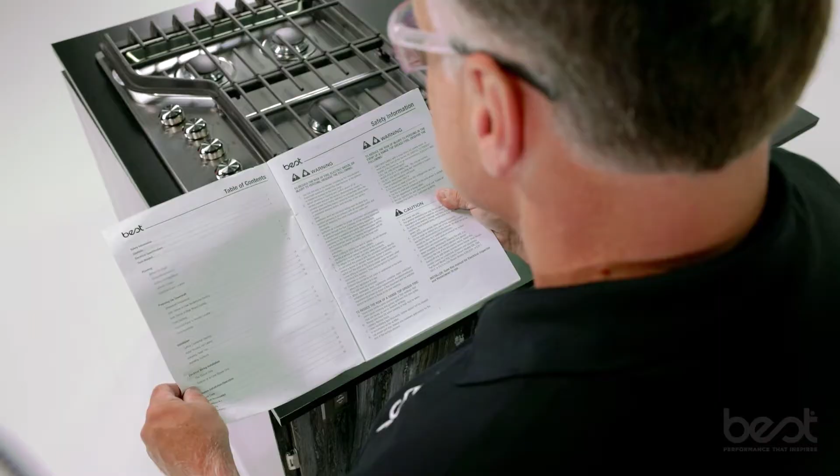Your safety is our priority. Please read all safety instructions included in your installation manual before installing your Downdraft Range Hood. Always disconnect power before installation or servicing. Installation work and electrical wiring must be completed by qualified persons in accordance with all applicable codes and standards.

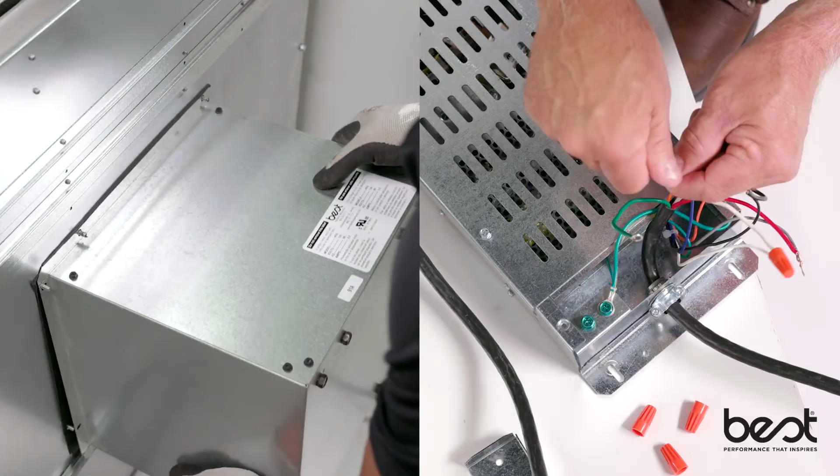Always wear safety glasses and gloves while installing, servicing, or cleaning the unit. And keep your installation manual handy, as this video will refer to it. The basic steps of installing the unit include the following: cutting out the countertop opening, mounting the unit in the cabinet, installing the blower and electrical panel, connecting the ductwork and electrical, installing the trim, and installing the cooking appliance.

Before getting started, however, there are a few important things to do. Gather your tools. The basic set of tools you will need for the installation include a measuring tape, pencil, Phillips screwdriver number 2, nut drivers 11/32, 3/8, and 7/16, saw, spirit level, tin snips, work gloves, and aluminum tape. Do not use insulating tape. Other tools may be required to complete the installation depending on the configuration and path chosen for the ductwork.

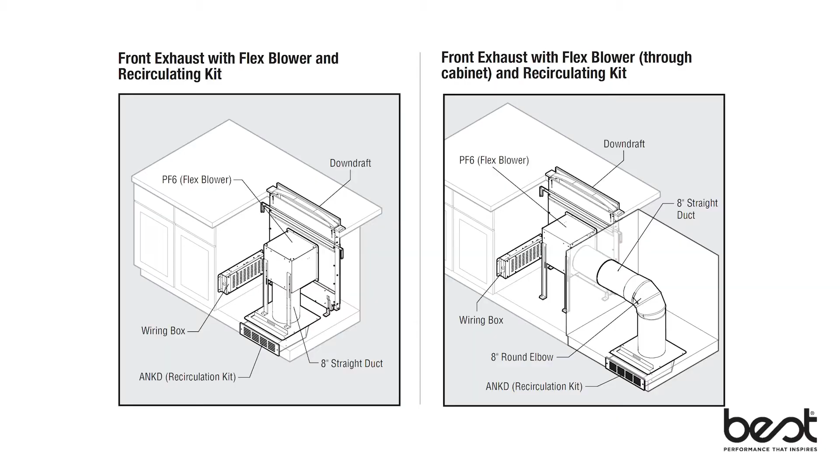Determine which configuration you plan to use to install the unit. Review the diagrams in the appendix section of the installation manual to determine the best configuration for your home. This will help ensure you have all the accessories and components you need. Pre-plan all electrical connections, ducting configurations, and blower options. The Range Hood unit is to be installed with separately purchased blowers.

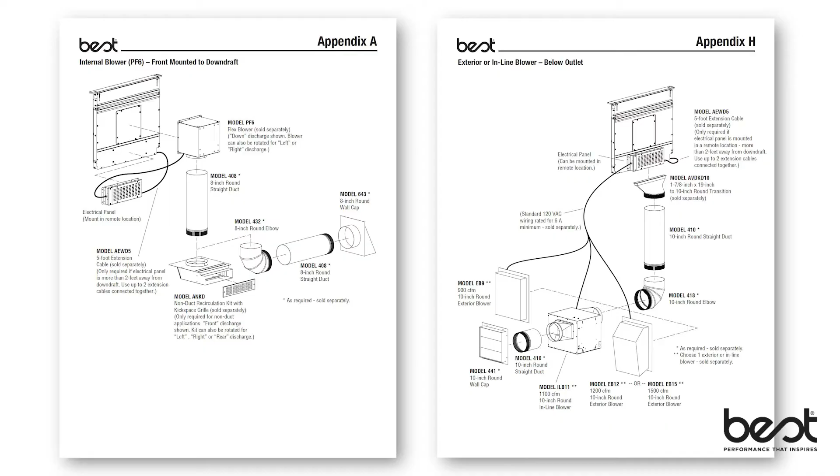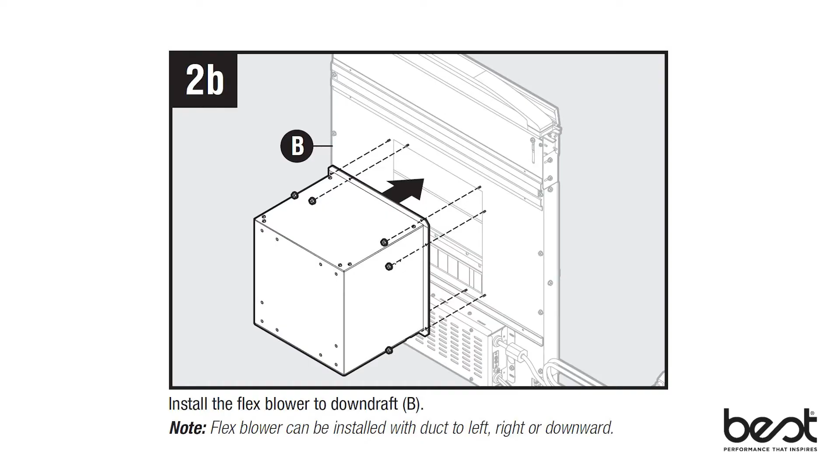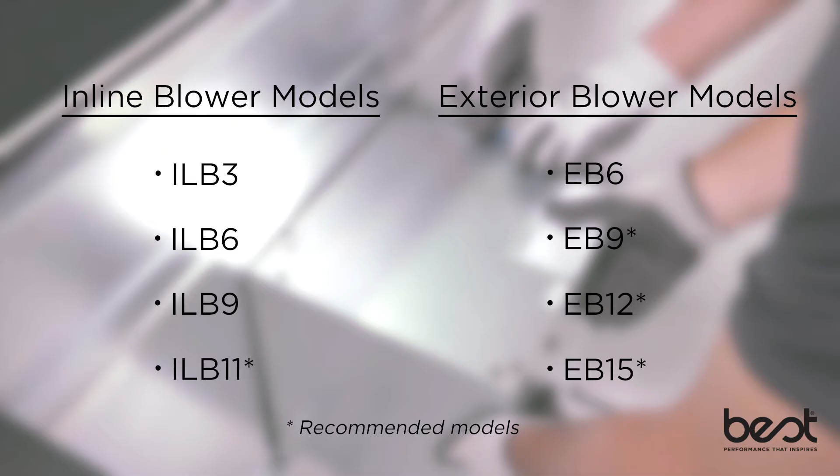The Downdraft Range Hood can be configured with an internal or flex blower, with a recirculating kit, or an external or remote blower. Review ducting configurations in your installation manual. The recommended model for interior or inline attachments is the PF6 flex blower. It can either be attached to the Downdraft unit or be used as an inline blower. Other inline models can include ILB3, ILB6, ILB9, or ILB11. Exterior models can include EB6, EB9, EB12, or EB15. Other blower models cannot be substituted.

For remote or exterior blowers, determine available space in the basement or under the cabinet floor with access to an outside wall for the venting system. Consider that the ductwork for remote blowers will be 10 inches wide. Purchase compatible ducting for your project before installation. The components can be found in the appendix of your installation manual. Contact your local dealer for any parts you may need for your installation. The item numbers are printed next to the drawings in the diagrams. Have all components ready before you begin installation.

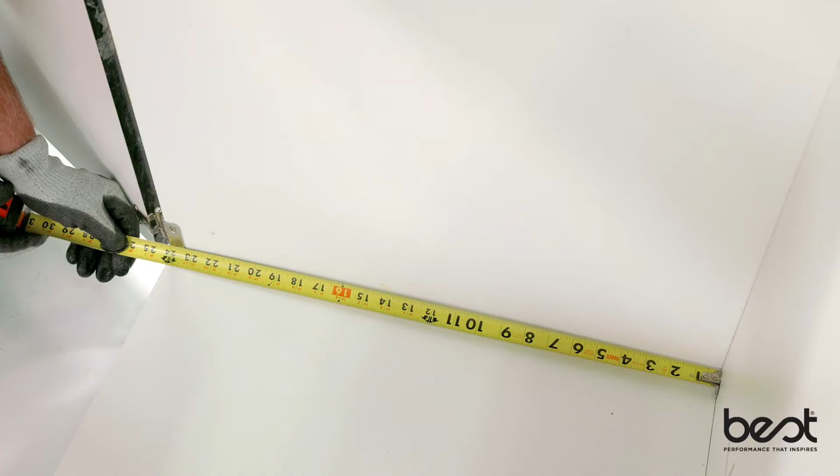Carefully measure the space where the unit will be installed. Verify dimensions of the cooktop, countertop cutout, and cabinet requirements. Oversized cabinets are recommended for easier installation. You will need space under or next to the appliance to ensure there's enough room for the Range Hood to fit correctly and to determine the best configuration to use. Refer to your cooktop installation instructions for proper dimensions, as cooktop depths can vary greatly.

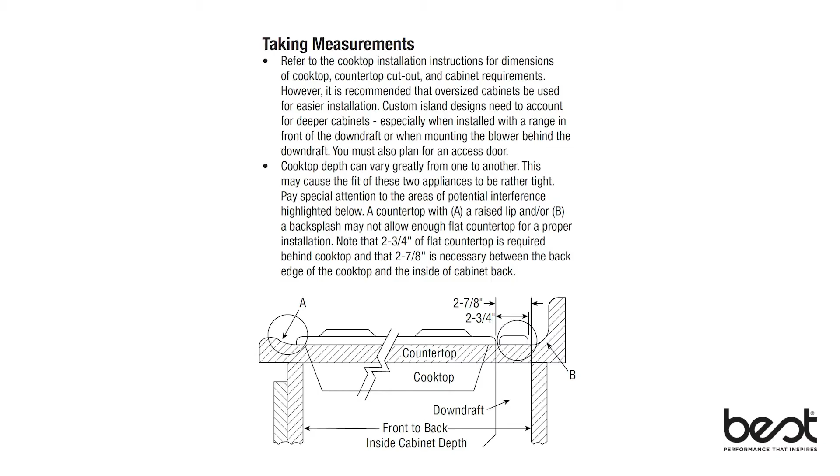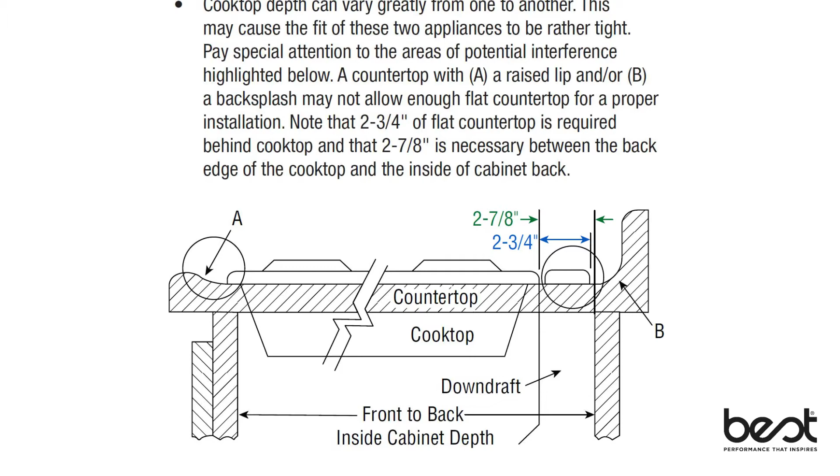Refer to the diagrams in your installation manual to check areas of potential interference along your countertop. Note that a countertop with a raised lip or a backsplash may not allow enough flat countertop space for a proper installation. At least 2 3/4 inches of flat countertop is required behind the cooktop, and 2 7/8 inches is needed between the back edge of the cooktop and the back edge of the interior cabinet.

For gas cooktops, you will need a gas cooktop seal kit to create a seal between the cooktop and the lower cabinet. Use a gas cooktop seal for gas cooktops only. Information can be found in the optional accessory section of your manual.

Pre-plan the electrical connections and arrange for a qualified electrician to install it. Ensure the electrician is familiar with the unit. Share the configuration that will be used. The Downdraft unit using the flex blower draws 3 amps and requires a 120 VAC 60 Hz circuit. If using an inline or external blower, the system will draw 6 amps and will also require a 120 VAC 60 Hz circuit. The outlet should be within 30 inches of the electrical box assembly.

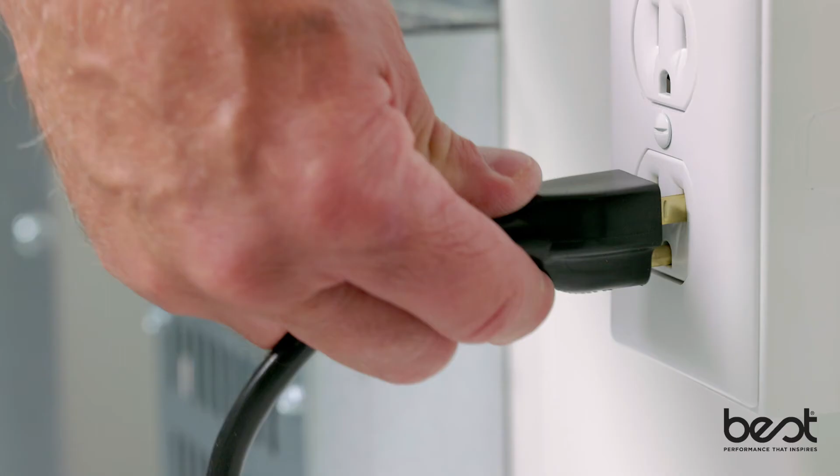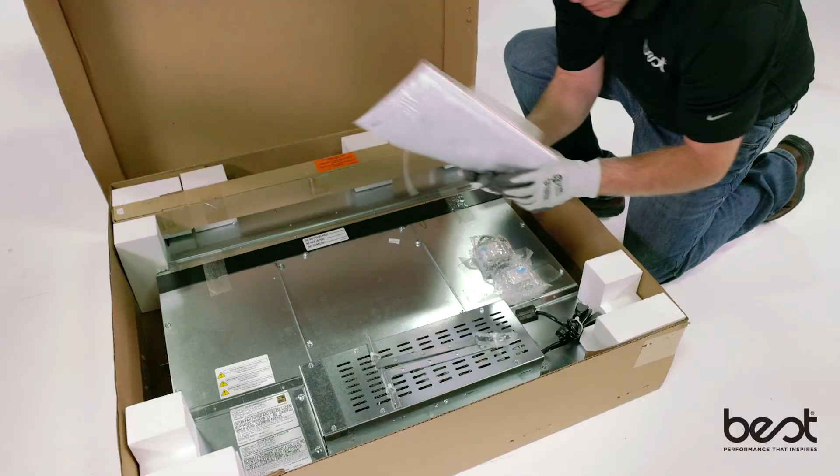Lay the box containing the unit on the floor and remove all staples. Lift the top of the box off the unit. Do not discard any packaging material until the installation is complete. Locate and save the template for the countertop cutout. When removing the unit from the box, the unit should be grasped at the sides by 2 people. Never lift from the top, as it may bend the trim. Refer to your installation manual to verify that all the included parts are present. Make sure any accessories you ordered are unboxed and on hand.

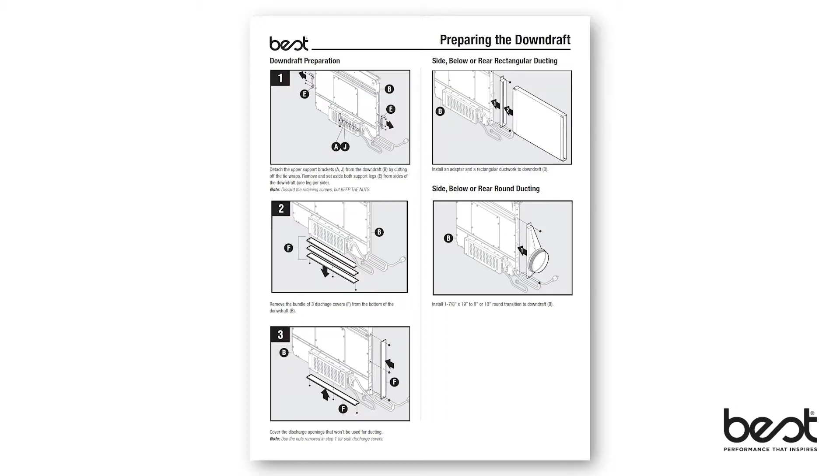Next, prepare the downdraft for installation. Refer to your installation manual for diagrams. Start by detaching the upper support brackets from the downdraft by cutting off the tie wraps. You will also need to remove the lower support legs, which have been attached to the side of the unit to stabilize the chimney during shipping. Save the nuts from the support legs to attach later for installation positioning. Remove the bundle of 3 discharge covers from the bottom of the downdraft and cover the discharge openings that won't be used for the ductwork.

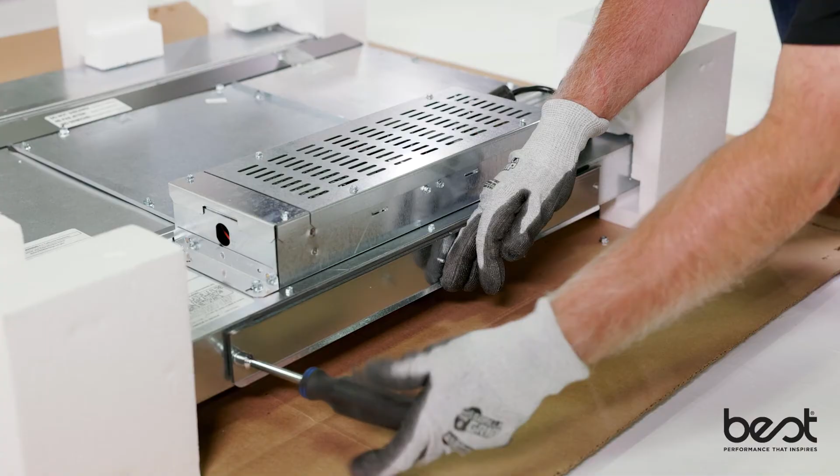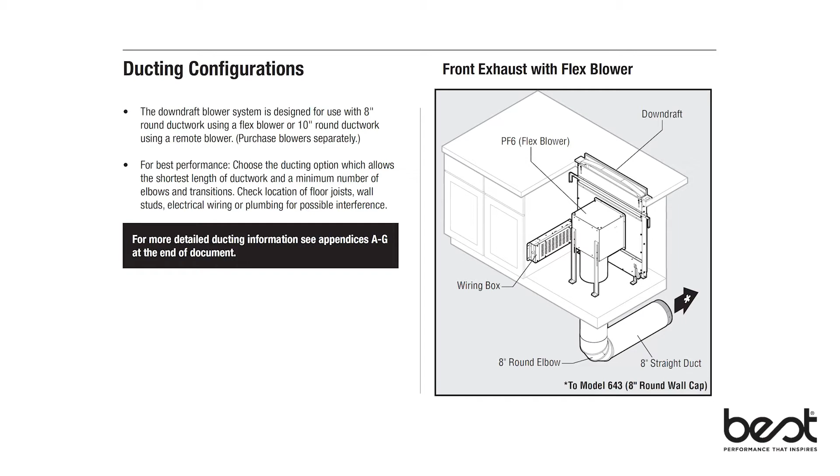Configure the housing to match the ducting options chosen for your installation. Refer to the ductwork configurations in the planning section of the installation manual for complete instructions for your configuration. In the example of the front exhaust ducting with a flex blower, install ductwork to the PF6 flex blower.

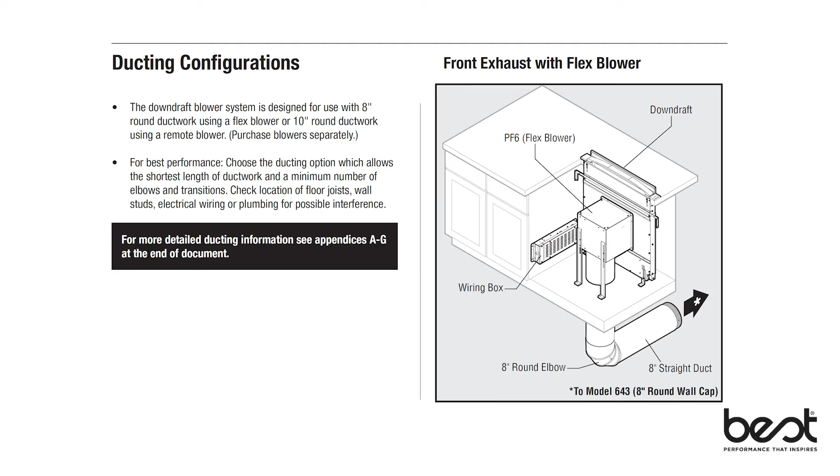For the final assembly of your downdraft unit, refer to the manual for diagrams. Attach the lower support legs that you previously removed. Use 1 nut for each leg. Slide the upper support brackets into the side channels of the downdraft. Remove the electrical panel from the downdraft. Most installations require the electrical panel to be installed in a remote location.

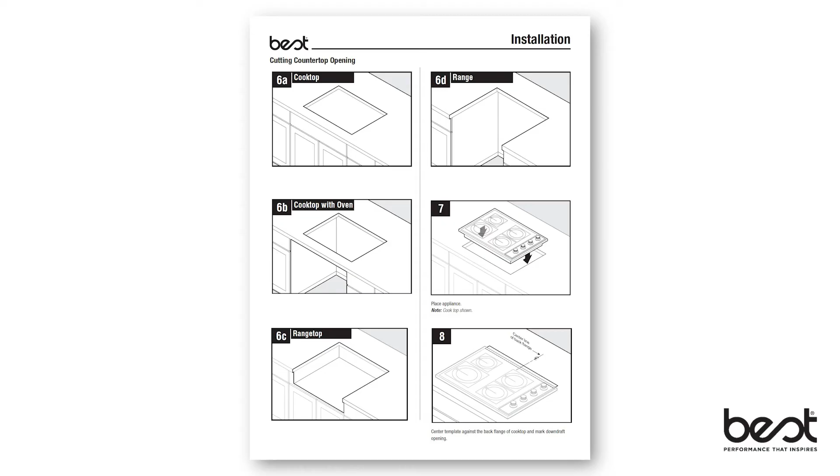The downdraft and cooktop must be installed in the same cutout in the counter. The downdraft cannot be installed in a separate slot in the countertop. Refer to your installation manual for various countertop configurations. You can use the downdraft unit with cooktops, ranges, cooktops with oven, or range tops.

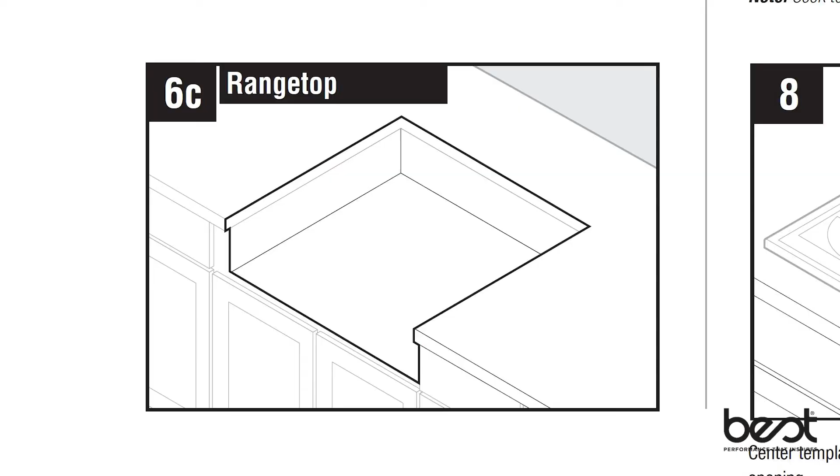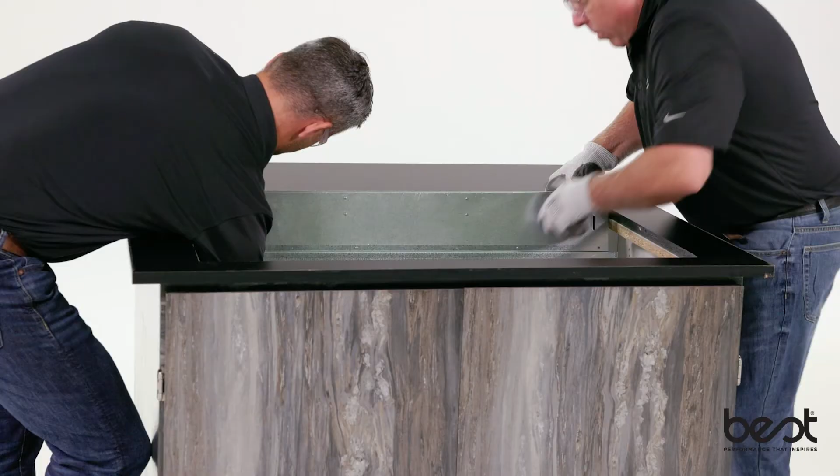Use the included template to mark the opening to fit the downdraft behind the cooktop, centering the template in the opening. Installation information can be found in your installation manual. Remove the cooktop or appliance if necessary and cut the opening for the downdraft unit. Set the housing into the cabinet, supporting the unit from the sides. Do not hold the unit by the trim pieces or flip door.

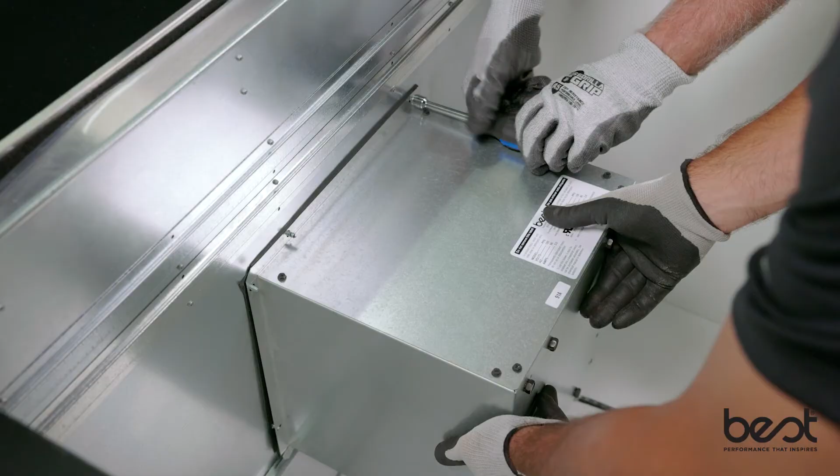Attach the support legs to the cabinet using 2 screws. If necessary, use wood blocks as spacers. Extend the upper support brackets and attach them to the sides of the cabinet using 2 screws per bracket. Level the housing and adjust if necessary. If you're using a flex blower, ensure the blower is supported while attaching it to the housing. Install round ducting to the downdraft.

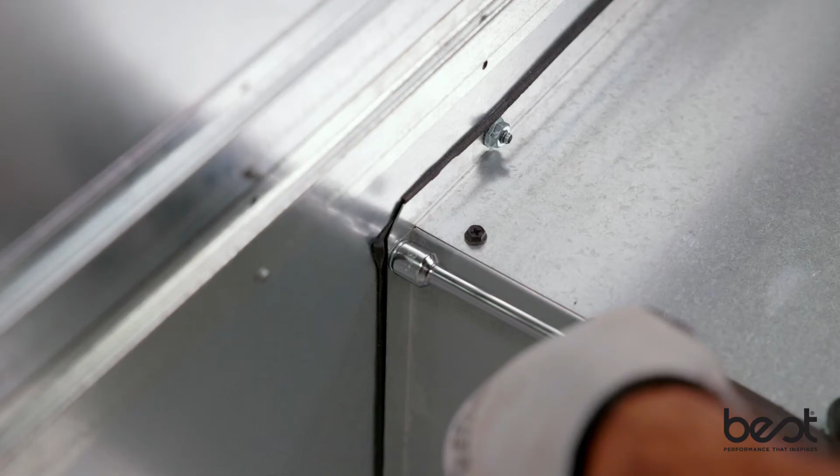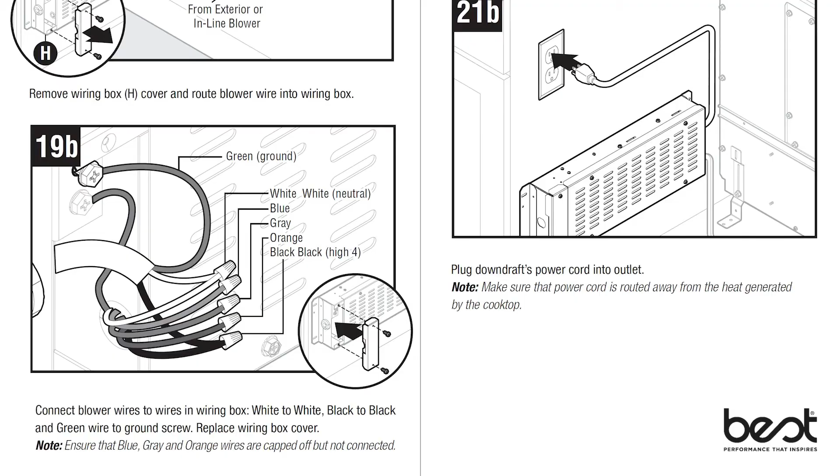For units using the flex blower, attach blower support legs with the supplied screws. Extend the legs and secure the bottom of the cabinet using 2 screws through each bracket. Retighten the blower screws. All electrical wiring should be completed by qualified persons. Wiring connections will vary depending on the blower you choose to install with your unit. Please refer to your installation manual for the correct wiring connections for your blower. Not all wires will be used for all configurations. All unused wires should remain capped.

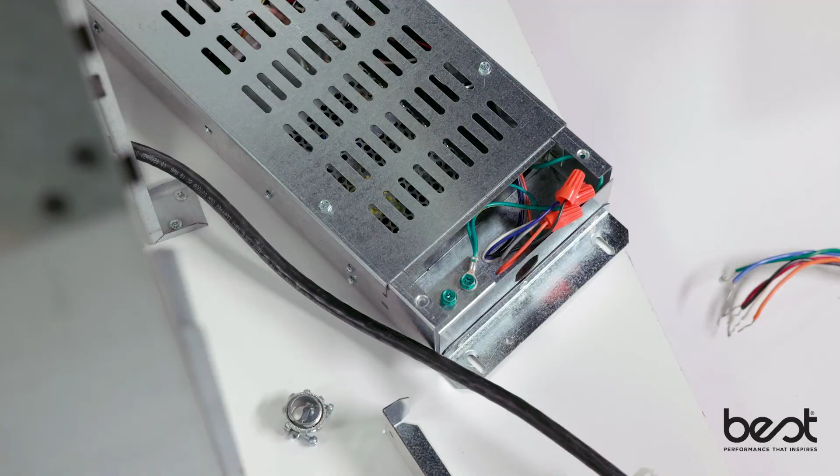In the case of the flex blower option, remove the electrical panel cover and route blower wire into the wiring box. Connect blower wires to the wires in the electrical panel. Inline and exterior blowers use 3 wires. The flex blower will use all 5 wires. Connect white to white, blue to blue, red to gray, orange to orange, and black to black. Connect the green wire to the ground screw and replace the electrical panel cover.

Plug the electrical panel cable into the lower receptacle on the side of the downdraft unit. Plug the downdraft's power cord into an outlet. Ensure that the power cord is routed away from the cooktop heat. Refer to your manual for diagrams on installing the finished trim.

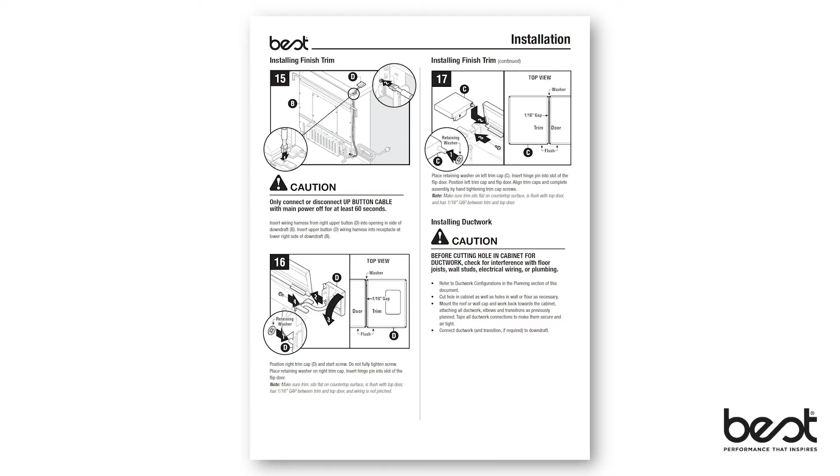Ensure the main power has been off for at least 60 seconds before connecting or disconnecting the up button cable. After the main power has been off for 60 seconds, insert the up button cable through the opening on the top right side of the unit. Insert the upper button wiring harness into the receptacle at the lower right side of the downdraft unit.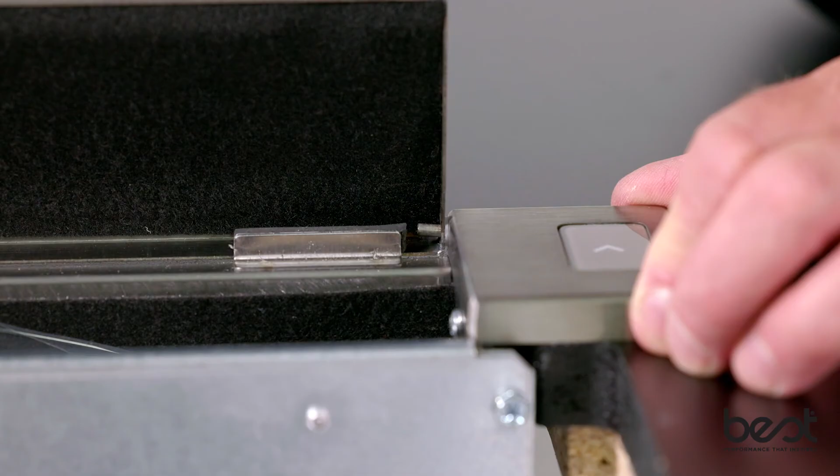Position the right trim cap and start the screw without fully tightening it. Place the retaining washer on the right trim cap. Insert the hinge pin into the slot of the flip door. Repeat the process on the left side. Align trim caps and complete assembly by hand, tightening the trim cap screws. Make sure the trim sits flat on the countertop surface and is flush with the top of the door. Ensure there is a 1/16 inch gap between the trim and the top of the door.

The D49M Series comes equipped with code-ready technology only when using the PF6 blower, which reduces HVI-rated CFM to allow a builder to meet makeup air codes without the need to install a makeup air damper. Ensure all wire connections have been made before turning on power. Once the installation is complete, test all functions including up, down, and blower. Install your cooking appliance by aligning with the downdraft. Fasten appliance in place following your appliance instructions.

Always turn the downdraft blower on before you begin cooking to establish an airflow in the kitchen. Allow the blower to run for a few minutes to clean the air after you turn off the cooktop. This allows the kitchen to stay cleaner and free of odor. Use the rear burners when cooking with tall pots or when cooking will generate high amounts of smoke or steam. Operate the downdraft unit at high speed to increase the likelihood that all smoke and steam will be removed by the downdraft.

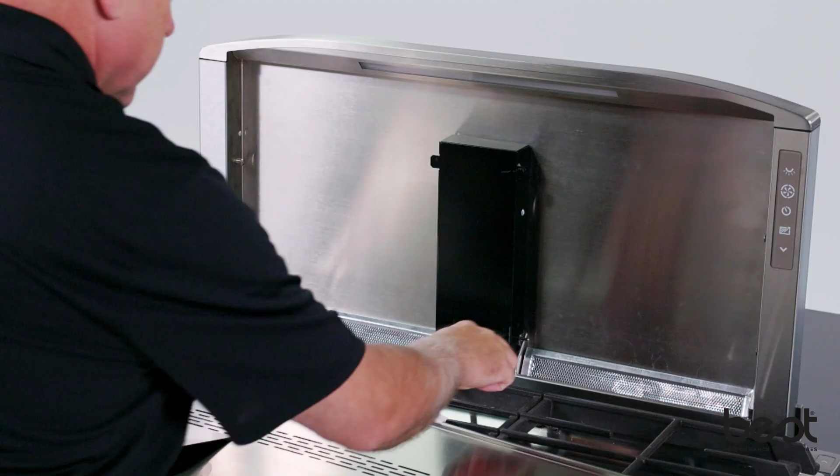To clean the grease filters, lift the front panel up and out and remove the filters. Clean these frequently using a warm dishwashing detergent solution. The grease filters are dishwasher safe. To service components such as the blower motor or air vent mechanism, it may be necessary to remove the downdraft blower system from the cabinet. Disconnect power to the cooktop and remove it first.